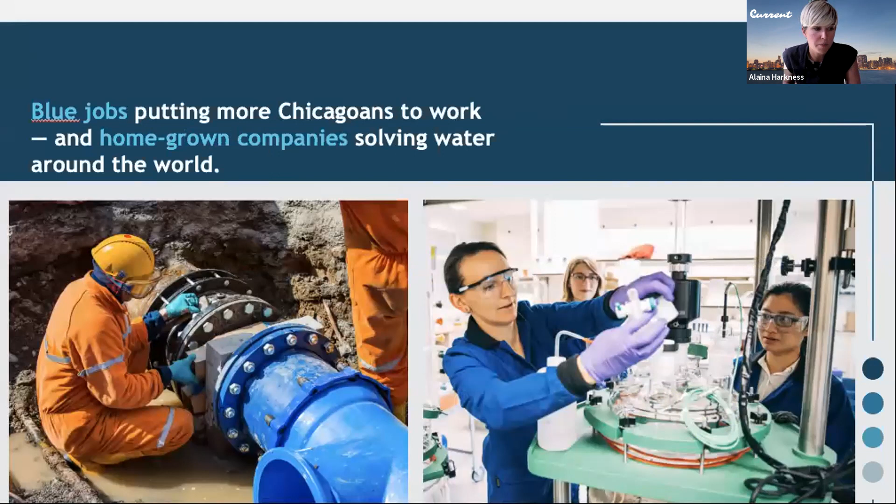Why are we here? We're here because we know that we all need more healthy water to drink and less flood water in our basements. These common challenges facing residents all around the world come to ground right here in our backyard in Chicago. We also know that we need more blue jobs, putting Chicagoans to work, and homegrown companies solving water challenges all around the world. At Current, we believe that there's an urgent need to rally faster behind the new ideas and technologies that will protect our health and environment.

We know that water problem solving is challenging, and it almost always requires collaboration. So Current is purpose-built to support partnerships and sustain them between industry, government, nonprofits, businesses, and the research community, all of whom are trying to figure out how to take more rational risks to try out new solutions and bring them to market faster. The way we work is to be an unbiased advocate for the best water solutions and policy. So it's our job to stay on top of the latest in water tech, knowing this field is rapidly changing and multidisciplinary, and then independently assess these technologies to understand which might be the best for others to try in their sites, whether it's utilities or corporate partners, or for us to pilot on our own, like our water quality project that we'll be launching soon in the Chicago River.

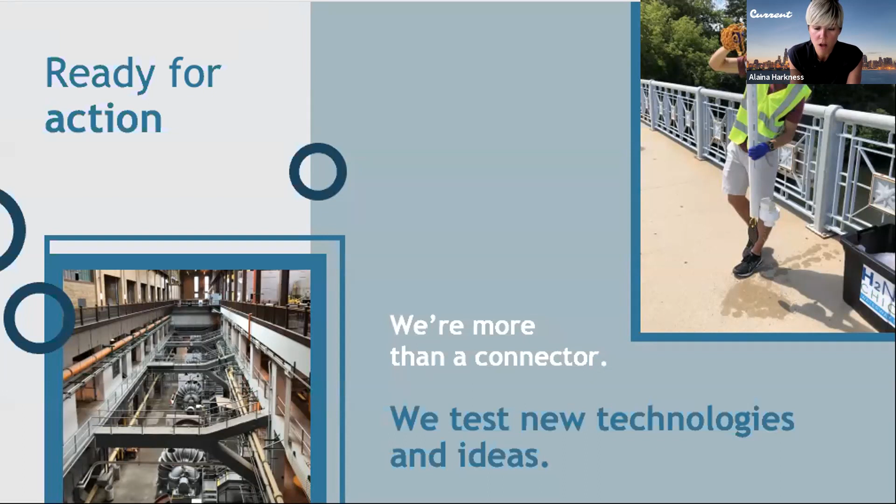We're also much more than a connector. We actually test new technologies in the real world. What you see here is a piece of that river water quality monitoring project, H2 Now Chicago, where we're actually developing a set of technologies to help test and share the real-time water quality in the Chicago River with the public. We're working on an evolving array of issues because the needs of our region are changing all the time. Sewage surveillance is one that we're working on right now, using wastewater as an early warning indicator for SARS-CoV-2 and other public health issues.

PFAS elimination, targeting and eliminating forever chemicals, and finding ways to better recover heat energy from wastewater. Renewable energy and meeting our climate goals, obviously a very important topic on all of our minds. For all of those reasons and more, we are always excited to bring the best minds from all around the world here to the Third Coast Water Seminars, here to Chicago, to tell us what they're learning and help us understand how we can translate that into actionable solutions for our region.

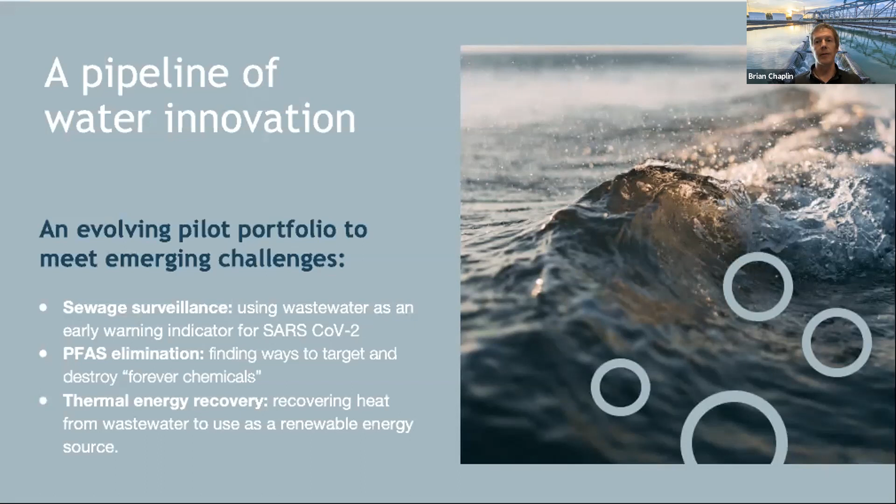Cliff is the Thomas C. and Colleen L. Wilmot Professor of Engineering, in the Department of Civil and Environmental Engineering, and the Center of Excellence in Environmental and Energy Systems at Syracuse University. He received his BS in Electrical Engineering from Carnegie Mellon and his MS and PhD in Environmental Engineering Science from Caltech. He served on the faculty at Carnegie Mellon for 33 years before moving to Syracuse University in 2010.

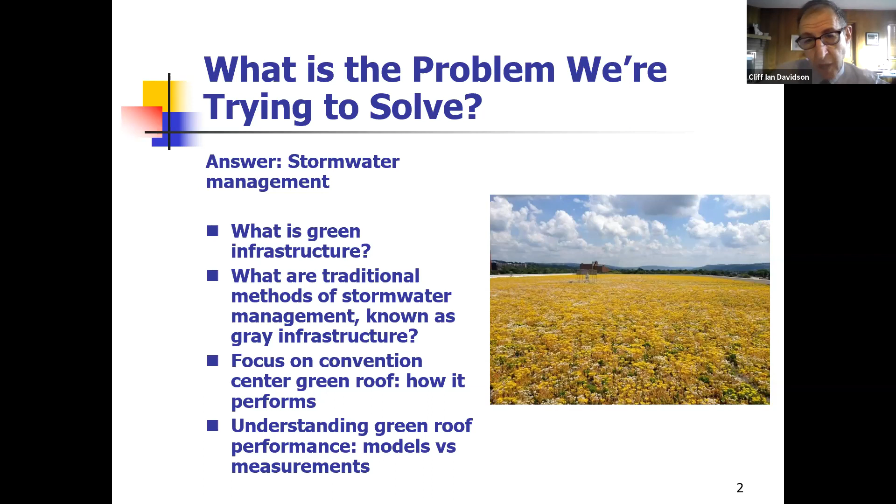When we talk about green infrastructure, we really mean infrastructure that is resilient. The meaning of resiliency is basically that whatever it is that's resilient is able to adapt to a variety of disturbances, can recover from disturbances, and has a capability to mitigate against risks and unknown incidents that might occur. So in the context of infrastructure, resiliency really refers to the concept behind the purpose of infrastructure, which is to deliver a service. As long as the infrastructure is able to recover from a disturbance and can continue delivering its service, this is considered resiliency, even if the infrastructure may look, behave, and perform completely differently than before the disturbance. As long as it can perform this service, it is considered resilient.

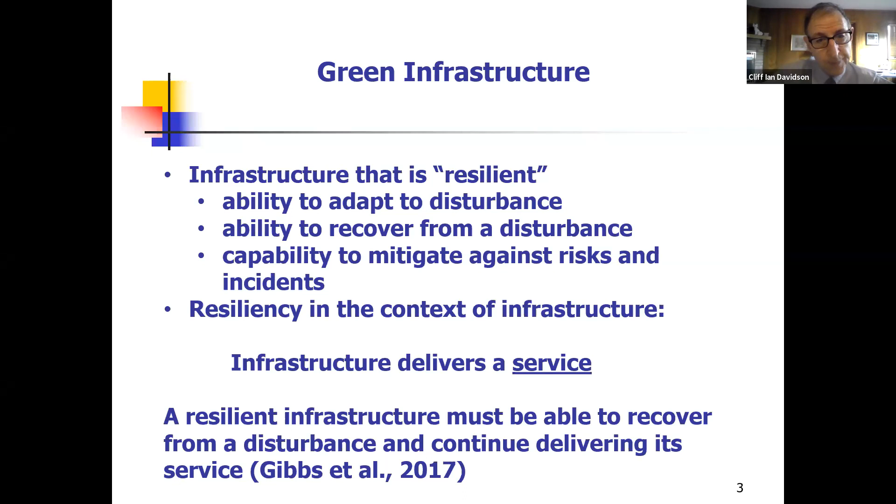What are some examples? I've just listed 5 here, and you can read these. The main idea you notice immediately is that we are talking here about vegetation, about green, meaning green plants. So actually, green infrastructure in general usually means a living system, and that has some profound implications.

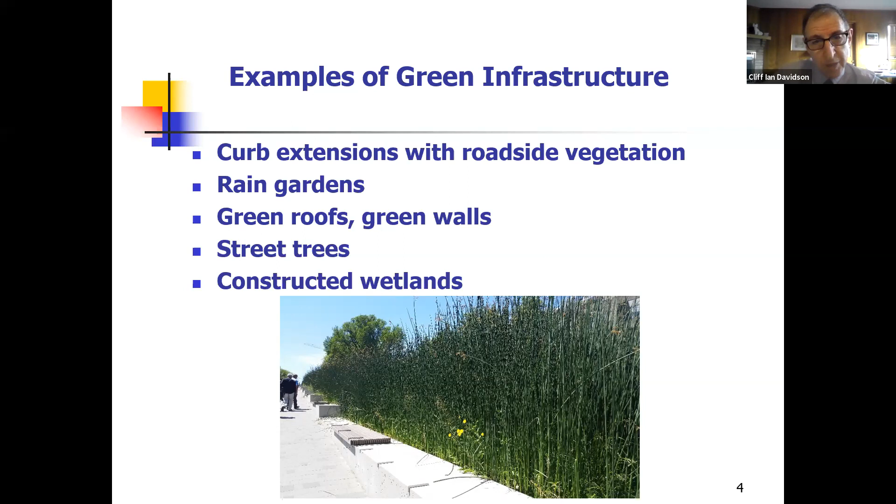If we look at green infrastructure as a living system, this gets us to the concept of ecosystems. There are not many systems that humans have built that are truly resilient. In fact, I could go out on a limb and say we have never been able to build a system that is truly resilient.

However, it is true that ecosystems are resilient, and that doesn't mean they are efficient in terms of air, water, energy, materials, and so forth. In fact, there's a whole lot of redundancy, which generally means the opposite: a certain level of inefficiency. If one species of plant or animal dies out, the function of the ecosystem can be replaced by another species.

However, what we know from looking at the history of this planet is that ecosystems have been able to continue indefinitely. Not all components, but the ecosystem as a whole.

This last bullet item is important to realize: in some cases we call things green infrastructure even though they do not actually have living components like vegetation. Permeable pavement is one of those. But permeable pavement is called green infrastructure because it's intended to mimic living systems. In this case, it's intended to mimic natural soil, which of course has both living and non-living components. We know that water can infiltrate through permeable pavement in much the same way that it can permeate or infiltrate into soil, with vegetation or without.

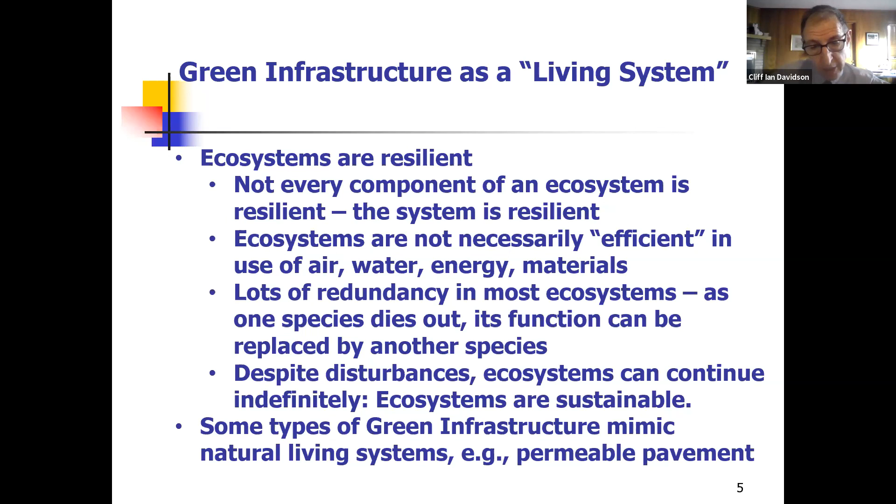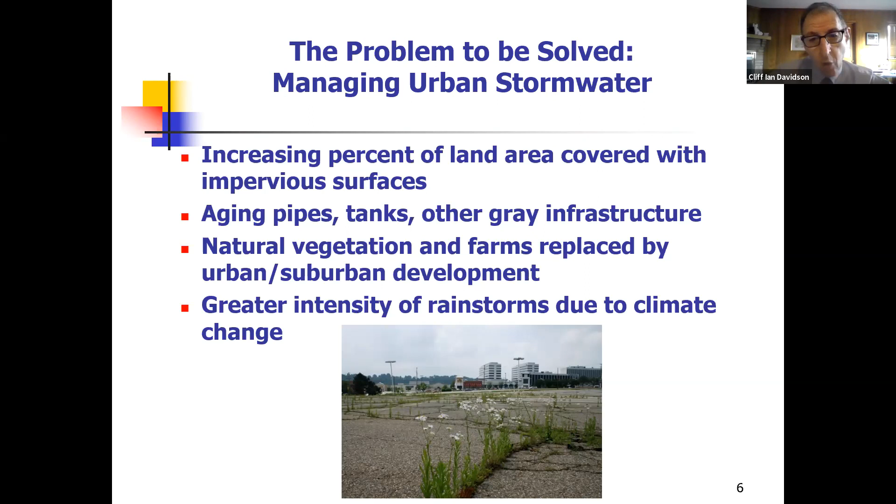You can read essentially the issues that are involved here and why we have a problem managing urban stormwater. We've got more impervious surfaces and a lot of gray infrastructure that is aging, plus what we had prior to that development was natural vegetation, or in some cases farms. And now, to make it even more difficult, we've got a greater intensity of rainstorms and more frequent rainstorms due to climate change. All of these contribute to the challenge that we face.

If we look at the increased impervious cover, we can see the changes in the hydrologic cycle. With natural ground cover, on the left, roughly 50% of the water that falls as precipitation is infiltrated, about 10% becomes runoff into rivers and lakes, and about 40% evapotranspires back into the atmosphere. In contrast, an urban area with 75% to 100% impervious cover, typical of heavily urbanized areas, has only 15% infiltration instead of 50%, and 55% runoff instead of 10%. So this changes the dynamics of the hydrologic cycle very significantly.

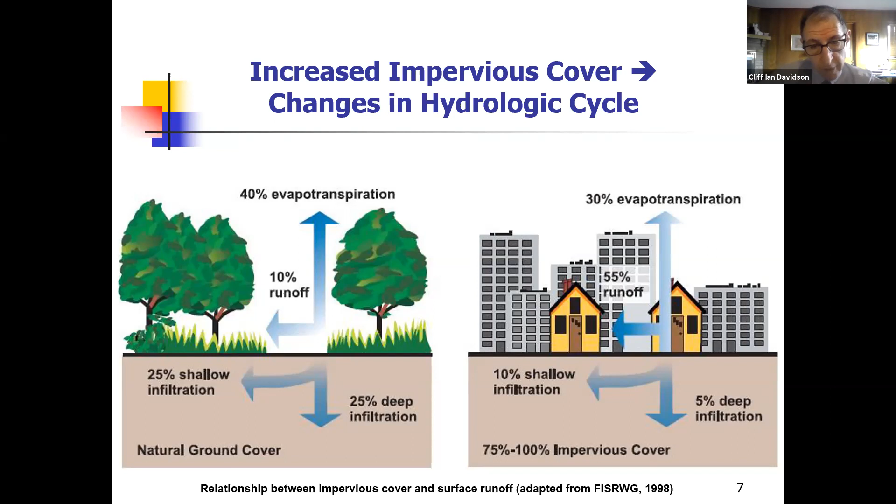What are the implications of these changes? Well, obviously all of you recognize the importance of flooding as a big problem with our increased frequency and increased intensity of rainstorms. We've also got contaminants going into our surface waters. We are not recharging our groundwater as we would in a natural environment. And finally, combined sewer overflows now become a serious problem.

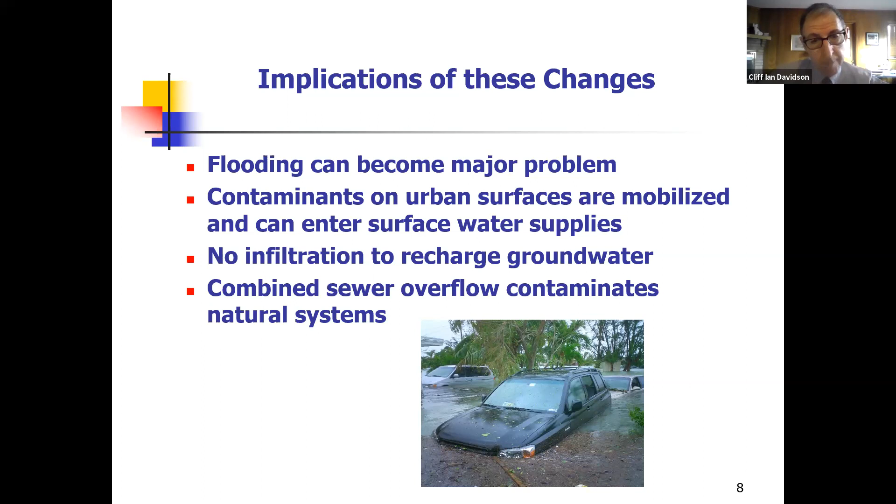So let's take a look at combined sewer overflows for a minute, because they have really become a mainstay in urban areas. A lot of urban areas have combined sewers, meaning those sewers are intended to carry stormwater as well as the sewage coming from our wastewater generation.

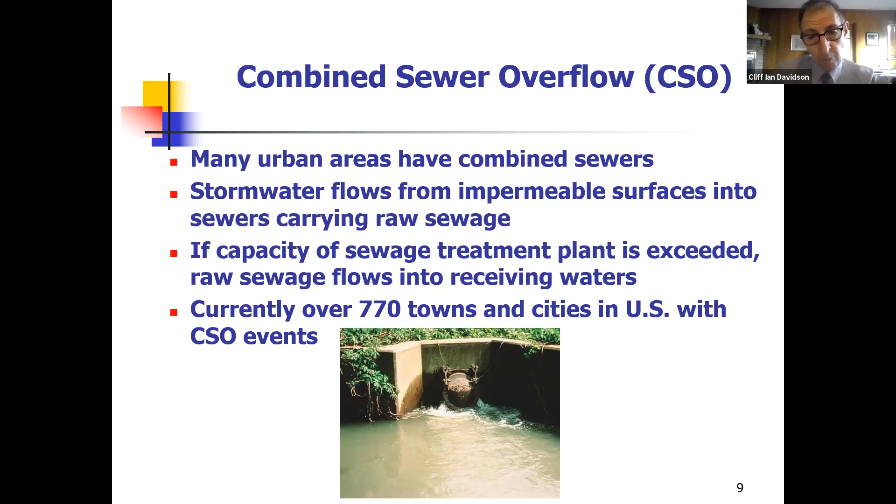If the capacity of the sewage treatment plant is exceeded, there is no place to put all that raw sewage and wastewater. We're not able to treat it because the treatment plant does not have the capacity, so with no place to put it, all we can do is divert it into the receiving waters. We're not talking about a small number of towns and cities here—that number from EPA is 770 towns and cities in the US that have this problem with CSO events. This diagram shows pretty well what happens during a combined sewer overflow.

On the left side of the screen you've got a little house, a brick building, and a street with storm drains that are labeled. Water that is both wastewater and street storm drain water goes into the combined sewers, so the combined sanitary waste and stormwater go into the sewer system.

If you look to the right, there's a weir to prevent the combination of wastewater and stormwater from going out into the receiving waters during normal times. By normal, I mean the rainfall is small, or it's dry weather, so the wastewater treatment plant, up in the upper right corner, can handle all of the wastewater. If it's a light rain, that wastewater mixes with the stormwater, but it can all still be treated.

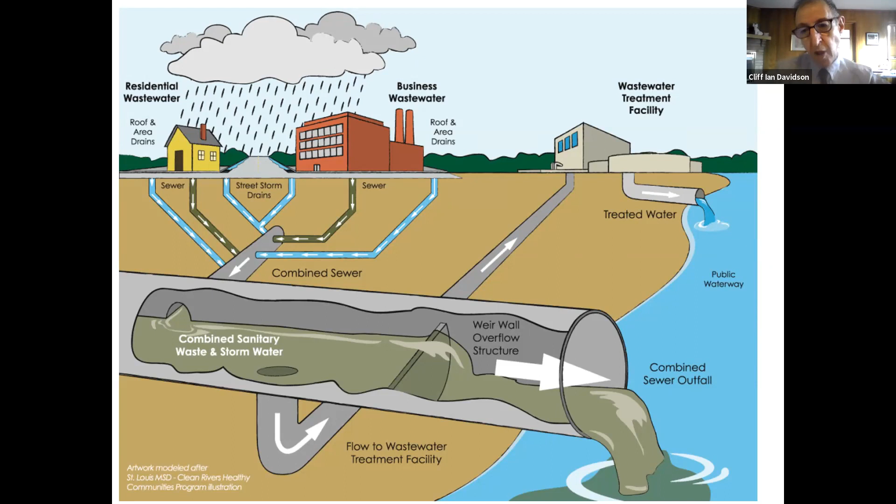When we talk about the 770 communities that have this problem, I've shown with black dots the cities in the US with a population over 50,000 that have CSO problems. You can see there are plenty of states in the West that do not have any CSOs.

States with a lot of big cities that are recent, like Phoenix, Las Vegas, and Reno, were developed late enough that separate sewer systems were built because we were aware of this problem.

Denver doesn't have an indication of a CSO, Salt Lake City doesn't either, and so forth. All of the recent development in Texas has also been accomplished without combined sewer overflow problems because of separate sewers.

So it's really those of us from, say, Kansas City, Omaha, and Des Moines, Minneapolis to the east, where you're basically going to find the combined sewer overflows. Chicago is in there, Evanston, Gary -- there are a lot of recognizable cities over 50,000 that have a combined sewer overflow problem.

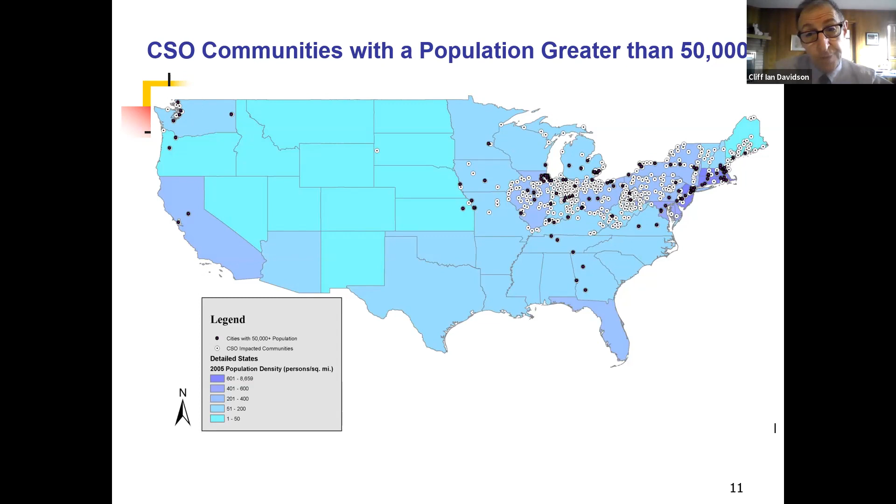So what are the traditional gray infrastructure methods? Well, those are mostly things like storage tanks and large pipes. In cities built more recently, there's separation of the sanitary sewers and the storm sewers. There are also regional treatment facilities, meaning you can build additional wastewater treatment plants to solve the problem.

I'll point out that's not a very efficient way to do things, because you're taking a certain amount of wastewater, diluting it by many fold, and then conducting treatment on a diluted system to remove the contaminants, which is a very inefficient way to do it. Before treatment, you want your waste stream as concentrated as possible so you can efficiently remove those contaminants.

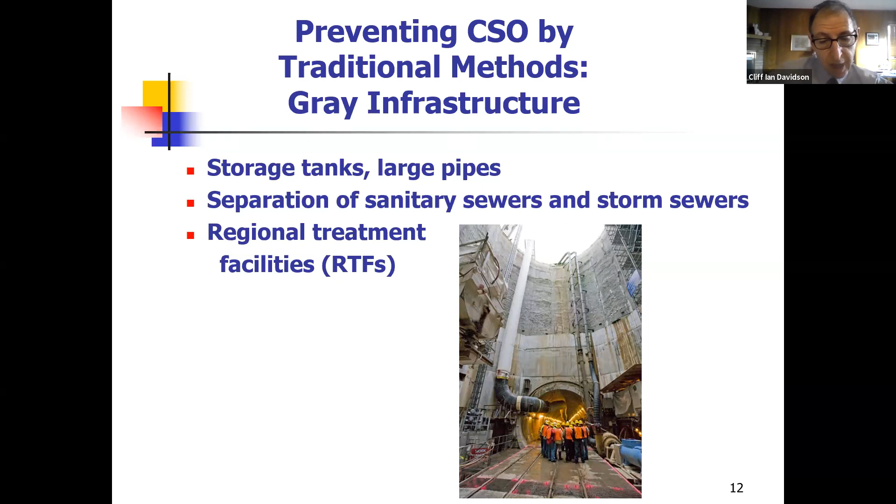So what are the stormwater management plans? Onondaga County, our county here in Syracuse, had its first consent judgment written in 1998.

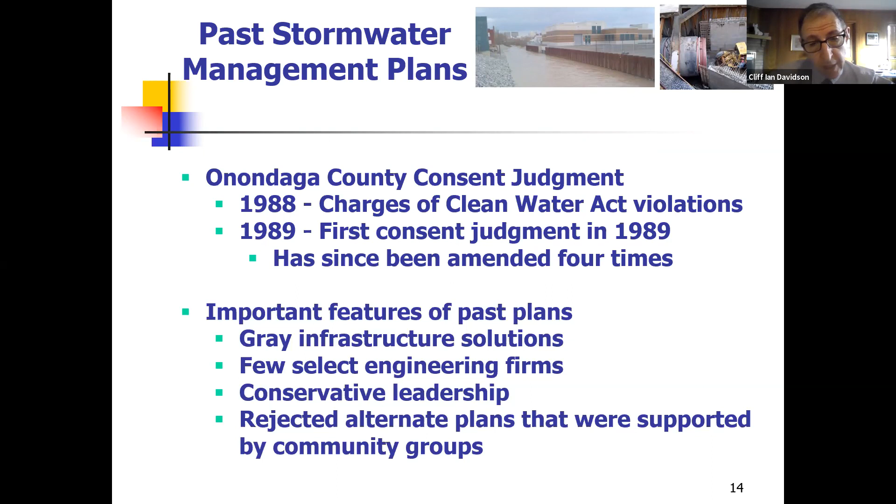There was a lot of community resistance in Syracuse in the early 2000s. There were lots of demonstrations, and those demonstrations on occasion even had violence associated with them, because it turns out that most of the regional treatment facilities that were going to be built in Syracuse were all in neighborhoods of poverty and underrepresented groups. So this is the opposite of environmental justice.

What are the problems with gray infrastructure? These sewage treatment plants are expensive to build and maintain. You have to keep using hazardous chemicals. They require large amounts of energy. And this is not something you can change easily—once you build these sewage treatment plants, you're going to keep them online for as long as you can.

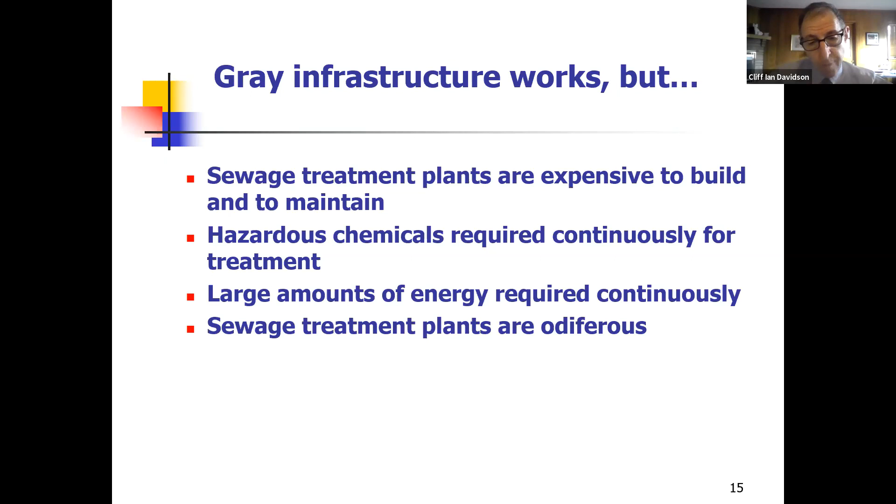Essentially what you are doing is committing a community to living with these odoriferous and unpleasant sewage treatment plants. And those sewage treatment plants, as I mentioned, are preferentially located in poor neighborhoods.

So what are the barriers to adopting green infrastructure? I want to point to the most important one, the first item on this list: the inability to guarantee precise outcomes. The truth is that none of the elected officials wanted to take the risk that if we were to go with green infrastructure, we would actually be able to satisfy the 95% amended consent judgment. Nobody wanted to take that risk.

What if the green infrastructure would not perform as it's supposed to? What if it would die? You know, Syracuse—I'm sure many of you know that Syracuse is well known for its snow. We're very proud of having the heaviest snowfall of any city over 100,000 in the continental US, and in the most number of years.

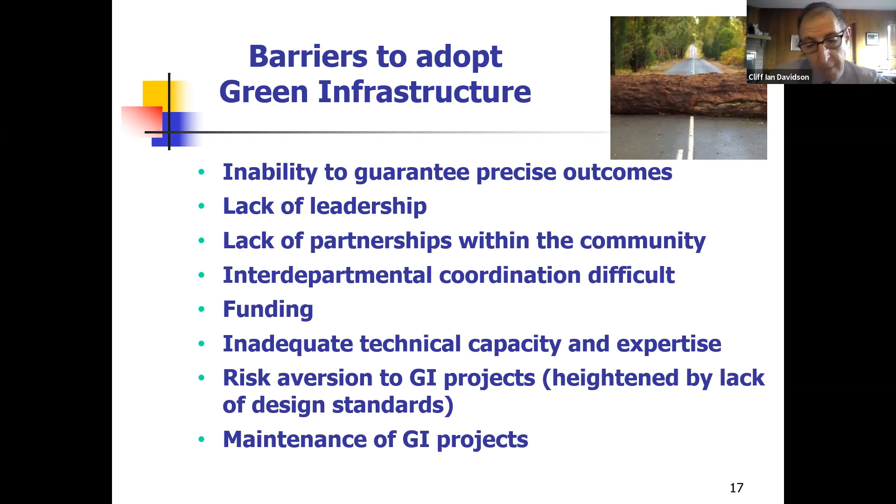We don't always win the Golden Snowball Award; however, we have won it more times than any other city for having the highest snowfall. There hasn't been enough work done with green infrastructure to know how infrastructure that started out being used in, say, Mediterranean climates would perform in a place like Syracuse. So there are real risks associated with this. Essentially, the elected officials were not willing to step up and take those risks.

In Onondaga County, we had a big change occurring in 2007 when a new county executive was elected—this is Joanne Mahoney. Joanne believed in green infrastructure and held a number of hearings with experts in the field. If you look at the middle of the slide, you'll see that in Syracuse we adopted the 4th consent judgment, which was the first time in the US that green infrastructure was listed as a direct legal requirement in the reduction of CSOs.

We were not allowing the construction of gray infrastructure alone to reach that 95%. Rather, a certain percentage had to be done with green infrastructure. By the time 2009 came around, using a combination of green and gray infrastructure, we had achieved 85% reduction, and we needed 95%. That's why the second bullet item on the slide says we still needed an additional 10% combined sewer overflow reduction in water volume.

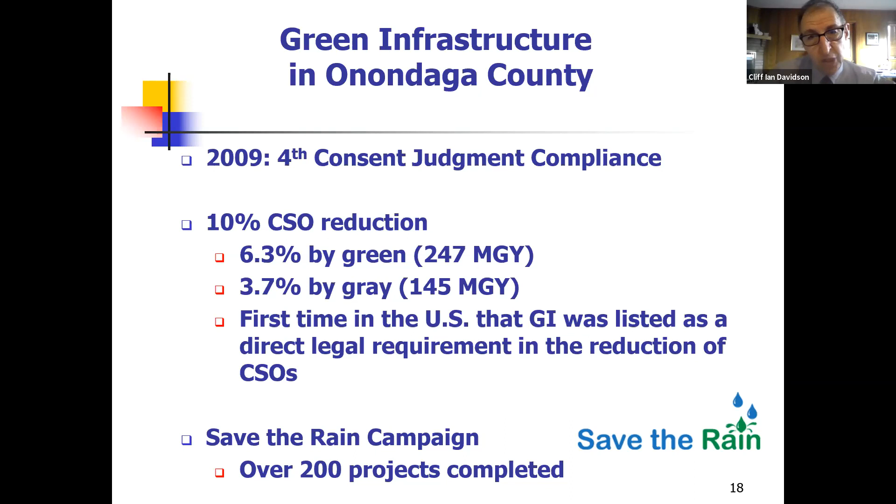This shows a diagram of the roof so you can get an idea of the placement of our sensors and also the placement of the roof drains.

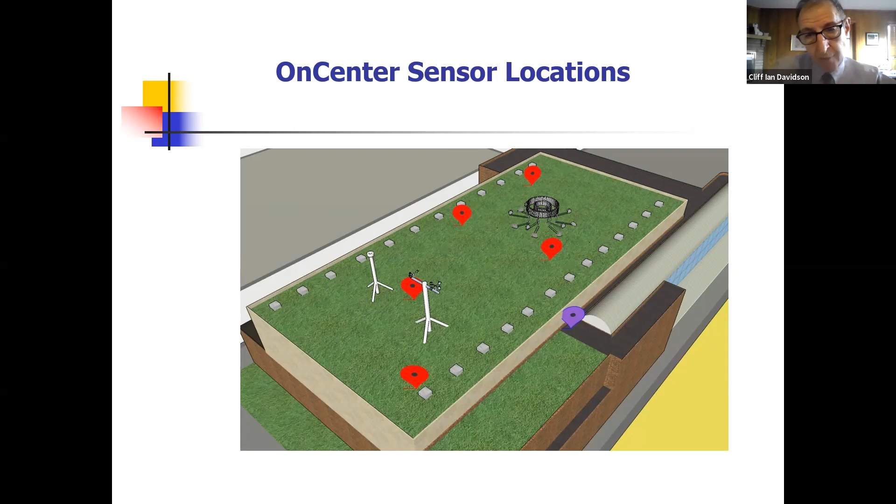This roof is aimed such that the building is built north-south. So to the upper right corner of the slide, that is the north part of the roof, and the lower left portion of the roof, that big wall, that's on the south side of the convention center. You can see all of the roof drains, which is where we're doing our monitoring on both the east side and the west side of the roof, plus our weather station, rain collector, snow collector, and various other collectors. We also have a lot of soil moisture sensors buried in the roof.

This shows a cutaway view of the layers of this green roof, and those little green rectangles are temperature sensors. So what we do is we measure the heat flow through the roof by looking at the temperature and calculating the heat flux through the roof.

The bottom of this slide shows the metal decking, which is at the bottom of the roof and serves as the ceiling of the convention center exhibit hall. We have additional sensors mounted inside the exhibit hall, and you can actually walk in and see those sensors up on the ceiling, which is about 35 feet high. So this is a pretty high ceiling, but in fact our sensors are quite easily visible.

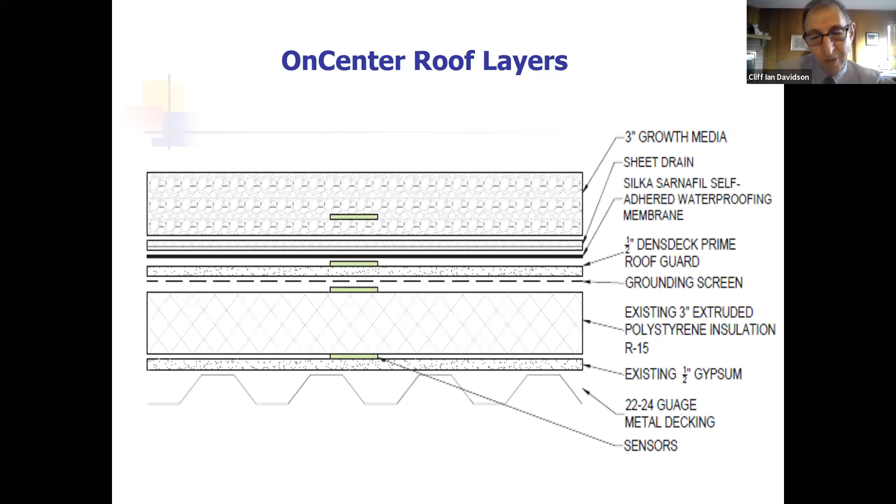We have had to do maintenance on those sensors, and this is not a simple matter. It involves bringing a lift truck into the exhibit hall. I'm happy to talk about that some more - there are a number of stories to tell about that, I'm sure you can imagine.

To do a water mass balance, we essentially look at the amount of precipitation, we look at the flow to the drains, and we know what the soil moisture is, so we can estimate the amount of moisture being stored in the roof. We have estimated the evapotranspiration using chambers, and we are doing additional research trying to use instruments like lysimeters up there. So in fact, we are able to put together a rough water mass balance.

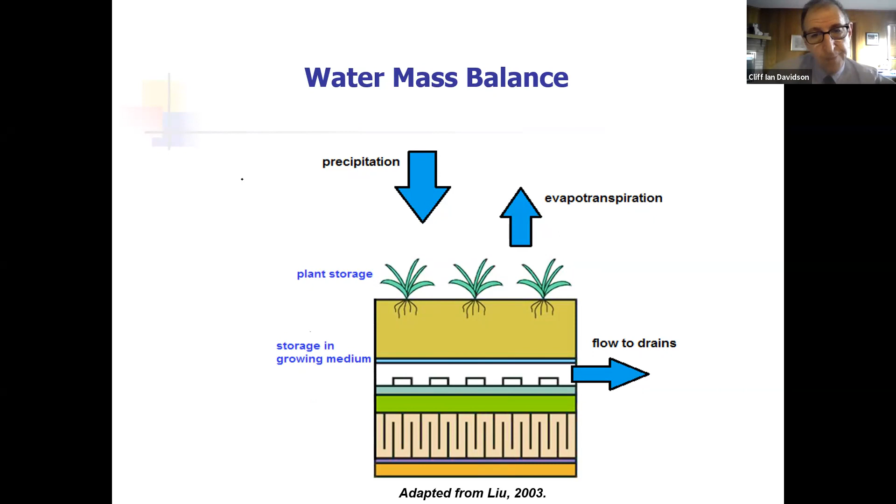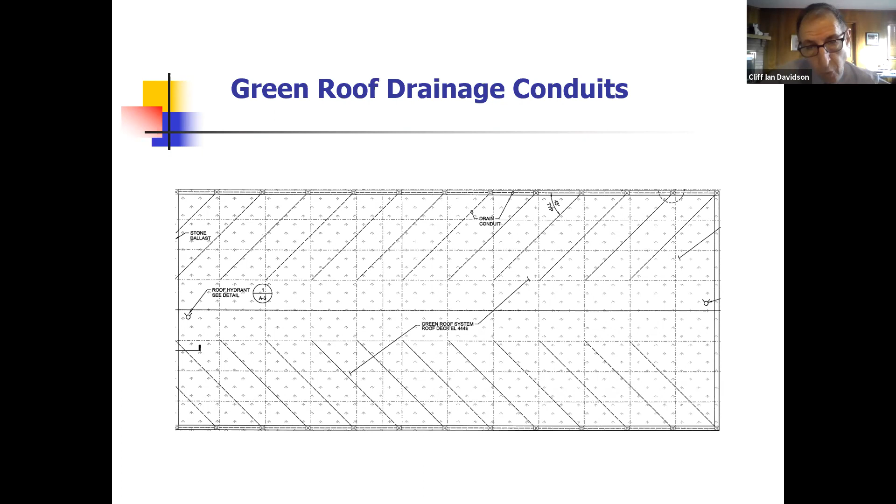I want to point out these drainage conduits, which are those diagonal lines that you see. Each of the roof drains has a roof conduit going over to the drain. When the roof was constructed, it was built so that there is a 1% slope between the middle of the roof and going down to the roof drains on each side. That line in the middle of the roof that goes north-south, that is the peak of the roof.

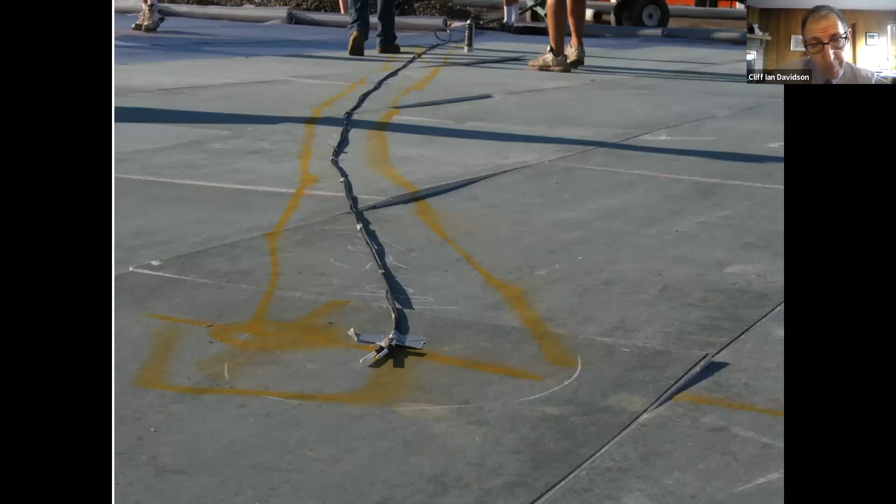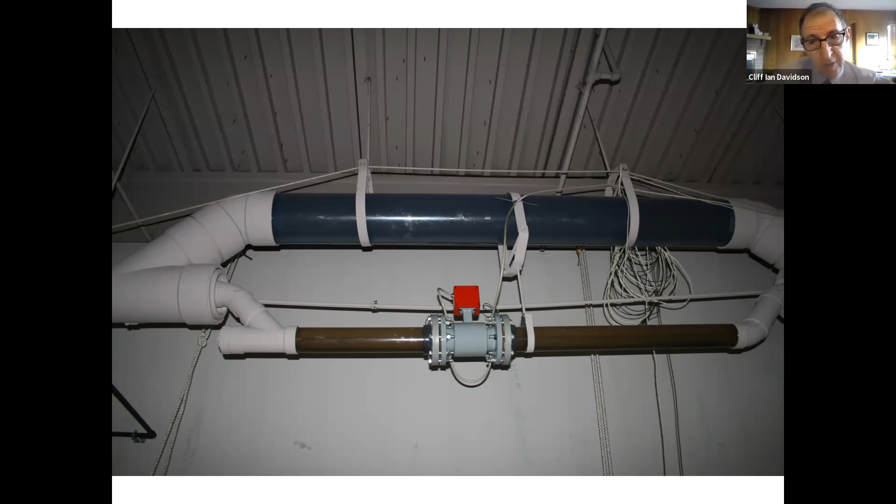Okay, a 21-month study was one of the first studies that we did.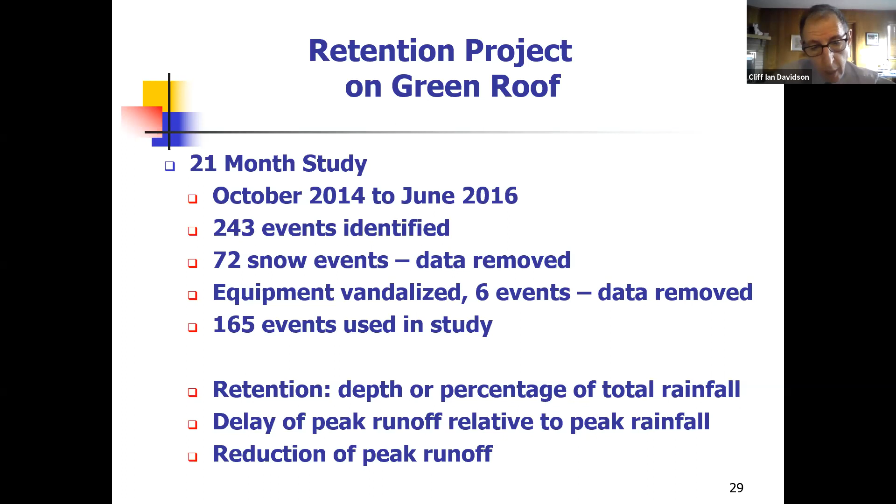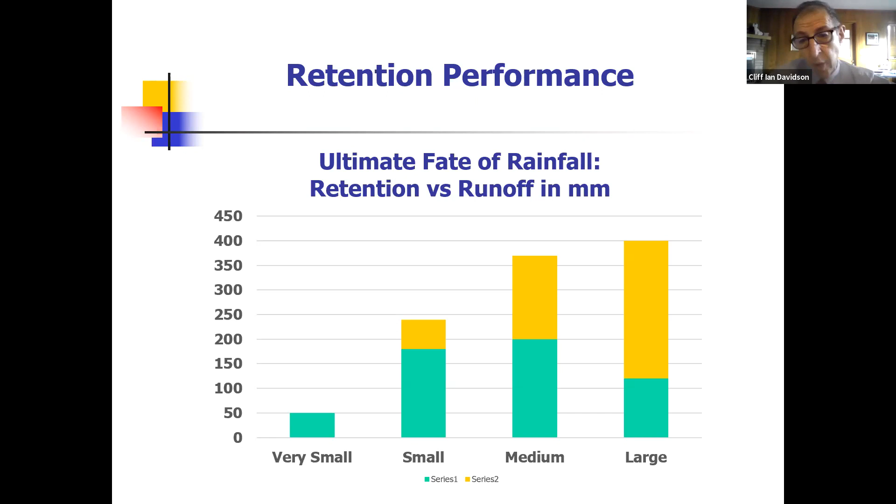This is 165 events. Because of lack of time, I won't go into a lot of detail, but we were able to do a lot of quantification with this study. You can see the overall retention performance. The green part of these bars is the amount stored in the green roof that evapotranspires, essentially flow that never made it into the combined sewers. The yellow is water that made it into the combined sewers and caused overflows. Very small storms are completely recovered by the roof, so there's no overflow. But even small storms, as opposed to very small, can cause some combined sewer overflow. Medium storms have more, large storms have a lot. So this is not a perfect solution.

And we did a lot of analysis. This basically shows the rain and the runoff. The runoff is the black bars, the rain the brown bars. This is an individual storm analysis. We do a lot of individual storm analysis looking at both the rainfall and the runoff.

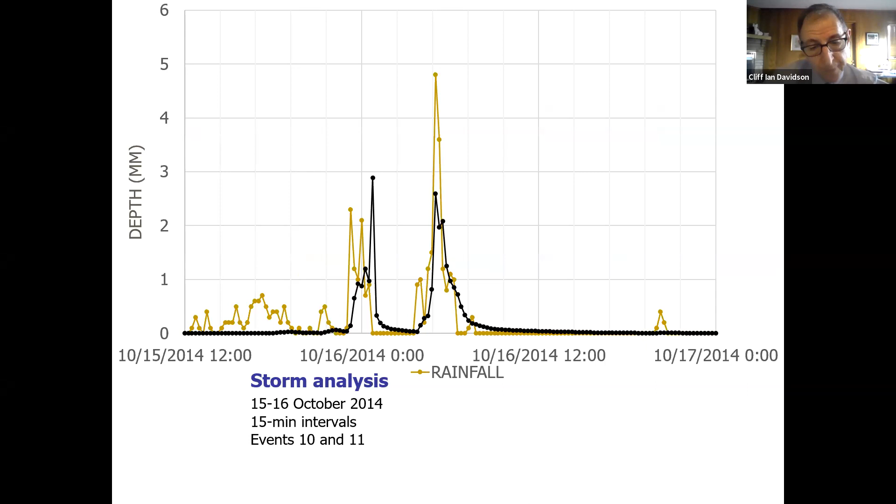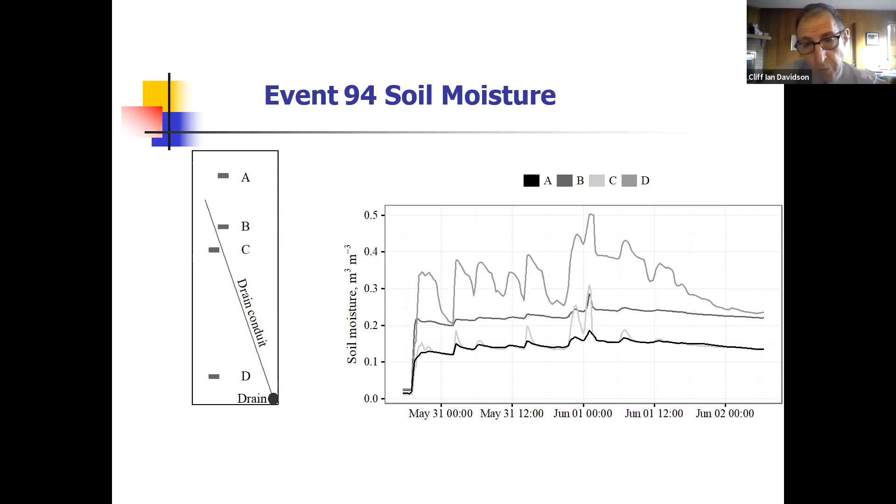We also do a lot of soil moisture analysis, and this just shows one particular storm when we were watching the accumulation of water build up in the soil and how much water was being intercepted by the drain conduit. Again, there isn't time to go into detail here, but there's a lot of analysis we're doing using the soil moisture.

Lastly, I wanted to mention the HYDRUS modeling we've done. My guess is many of you are familiar with the SWMM model developed by EPA. We started out using SWMM for modeling the convention center green roof. We found some very important characteristics of the green roof as a result of SWMM modeling, and we also found some very important characteristics of the SWMM model itself. We were not able to reproduce the data we were getting on retention and runoff using SWMM with what I would call reasonable model parameters. We had to resort to extreme model parameters that were not representing the real world, but were just being used to calibrate SWMM.

As a result of that problem, we switched over to HYDRUS. Now, HYDRUS does not have the same kinds of capabilities that SWMM does, so we're not able to do everything with HYDRUS that one can do with SWMM. However, HYDRUS is working using parameters that we measure and that are real world parameters. They're only giving us rough agreement, but nevertheless we're getting rough agreement. Here I've listed the inputs and the outputs.

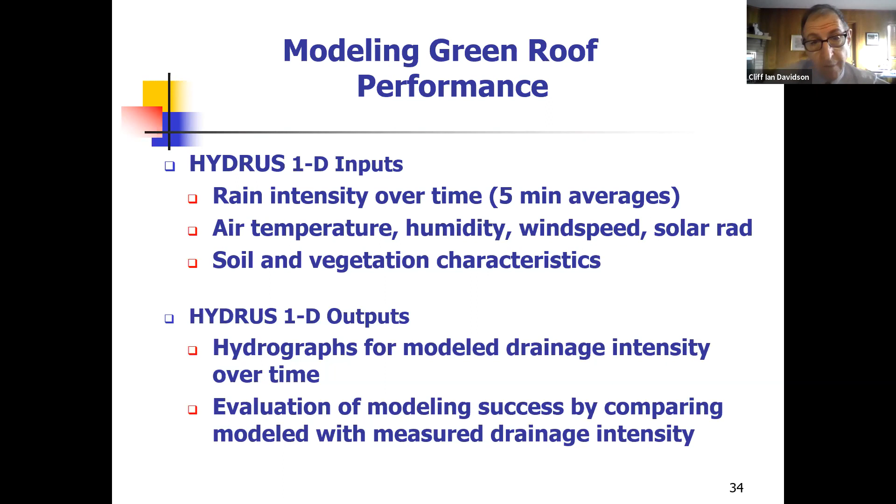This is actually brand new analysis. We are just doing this analysis with all of our data. As you can imagine, we have gigabytes of data going all the way back to 2014, and we are using storms with selected characteristics in order to do our HYDRUS modeling. So this is recent modeling, even though these are old storms. By the way, our data collection has not stopped. Now we've got lots more gigabytes of data, so there's a whole lot of work to be done here.

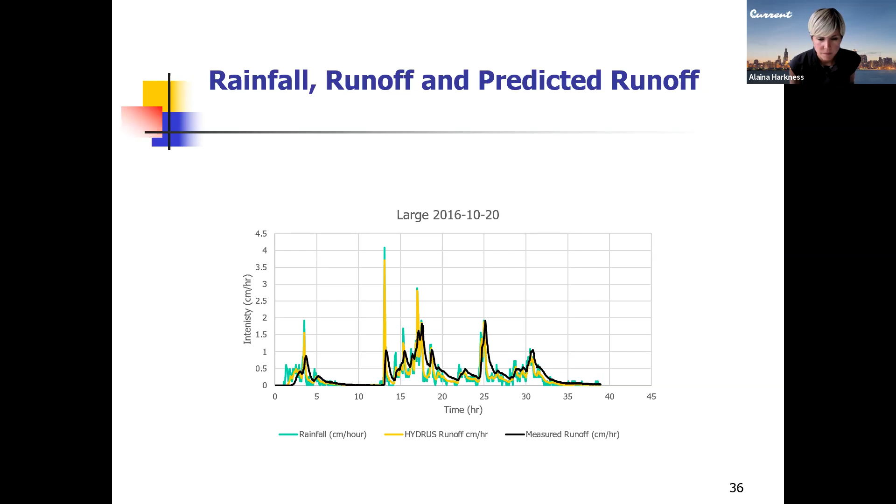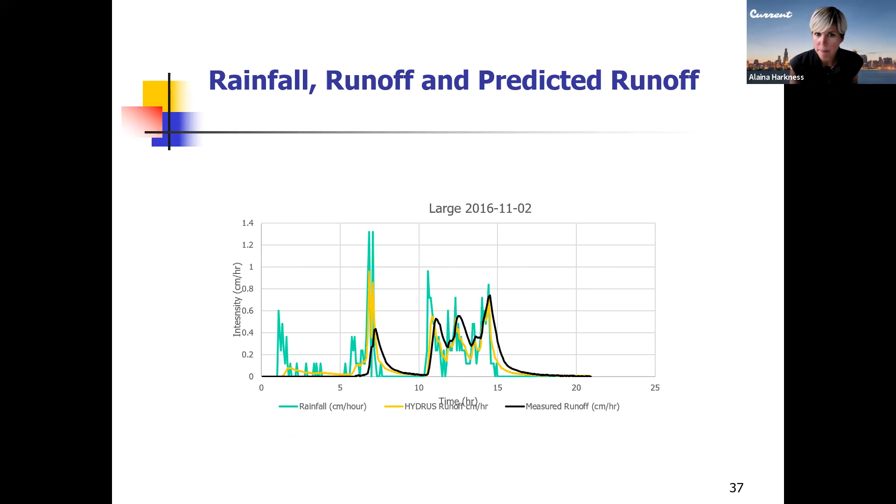Terrific. And I didn't want to cut off the rest of your slides. We are running out of time and have a great queue of audience questions. So I'll leave it to you to wrap up as you see fit here, but I do want to make sure we get to some more of these audience queries.

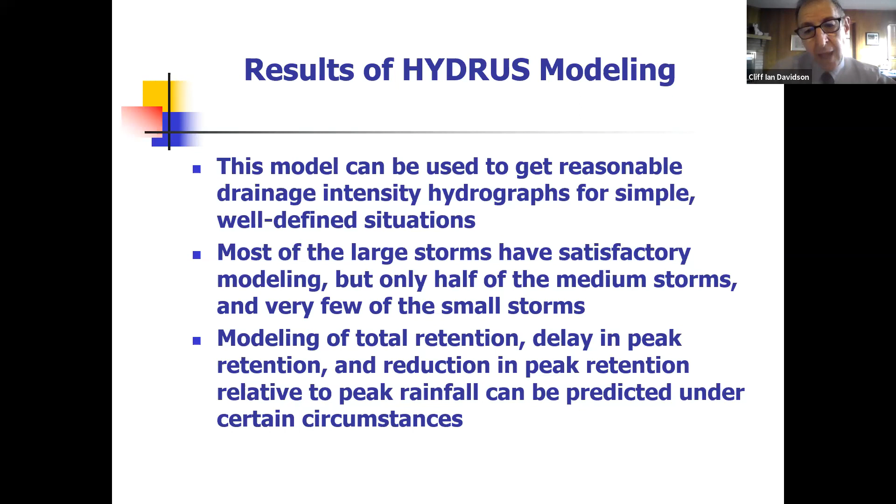Okay, in that case, I think what I'm going to do is go right over to the conclusions. You can read these conclusions, which are the results of the HYDRUS modeling. Basically, they confirmed what I've already said, that essentially we can do some modeling and we can get some approximate results.

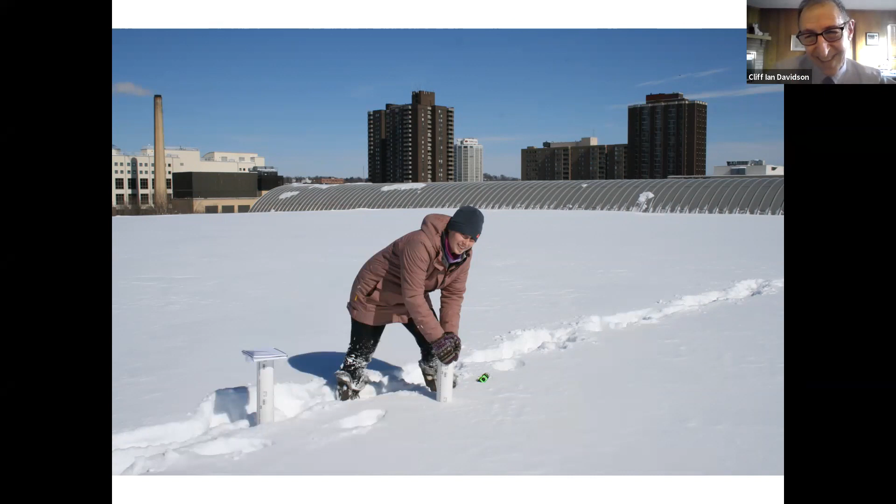These are just some pictures of my students. We do a lot of work in the winter. And this is the same graduate student, by the way, who's looking at the runoff coefficient. She's a very intrepid explorer. And there's my group up on the roof.

I will mention one thing more, and that is that one of the suburbs of Syracuse, which is the Solvay school system, has decided that they want to use the real-time website in their science classes. And so we are right now working out the wireless connections for the Solvay schools so that the science teachers will be able to use that in the classroom. So I will stop and take questions.

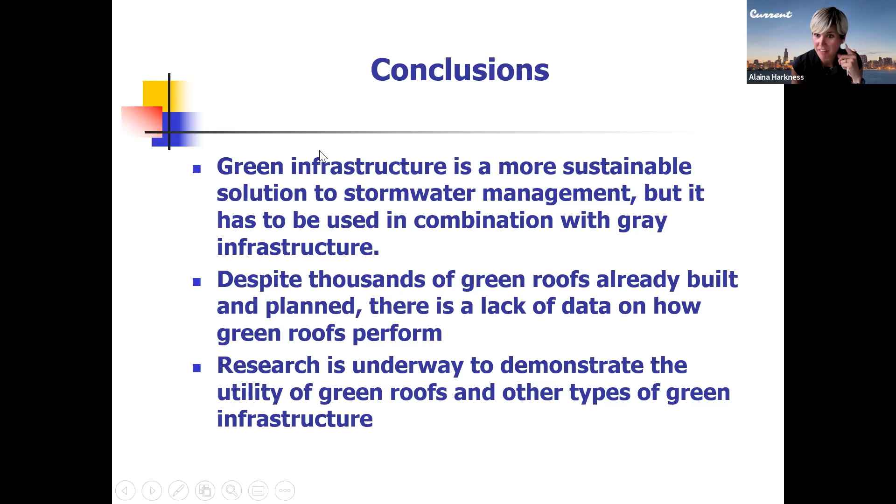Great. Well, thank you so much for this fascinating presentation. And I know many that are tuning in will be interested in following that real-time data as you're able to make that publicly available. I'm sure you've got a built-in audience here for that.

So I know there were several questions about the sensors, and you predicted this, the sensor layering. When were the sensors placed, what type were deployed, and what's on your dream development list for future sensors?

Well, I will say that the time scale for this was that this green roof was constructed in the year 2011. And this was essentially the reason that I moved from Carnegie Mellon up to Syracuse, because the county executive was, as I mentioned, really excited about green infrastructure, and she really wanted to have research done on the green roof.

And let me tell you that having the county as a team player in this kind of research is just a wonderful opportunity. And it would have been impossible to do this work without having the county not only behind it, but actually fighting for it to make sure that it would get done.

So the roof was constructed in 2011, and the sensors started going in 2011. It wasn't really until around 2014 or 2015 that we were able to get regular data coming reliably from the roof, and a lot of the most interesting data starts around 2016. We are still putting sensors in the roof, and I won't take the time to dream about what other sensors I'd like to put in, but let me tell you, the list is long.